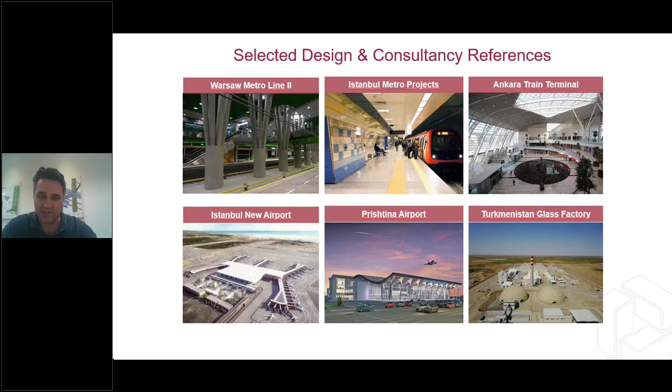And so this has kind of helped shape the way in which the software has developed over the years as well. So it just gives you some insight into what we're doing in practice, and you can see that we're also delivering projects just like you.

So there's an interesting timeline for what we've been involved with. In fact, as I mentioned, the office started back in 1935, and we started commercializing software in the early 90s. In 2000, we had what was then the global release of a product called Orion. So we commercialized the software which we had developed in-house in the early 90s, and it culminated with a product called Orion, which was released in the early 2000s.

We were one of the first to introduce bidirectional integration with Revit, being a physical modeling system. We started this process back in 2007, and we continued to develop that platform for many years, but then in 2015, we redeveloped the entire suite of products, which became known as ProtaStructure. This has evolved tremendously over recent years. And we're now in a position where we're in the process of completely redeveloping our whole platform, which is something we're very excited about and we're going to be launching very soon. So watch this space.

So we've got about 300 people on the design and development side of our business, and we support a range of interesting businesses across the world. I think there's over 10,000 people using our platform on a daily basis, and that's supported directly by us and our really valued partners in over, I think, 17 countries now, if I'm not mistaken.

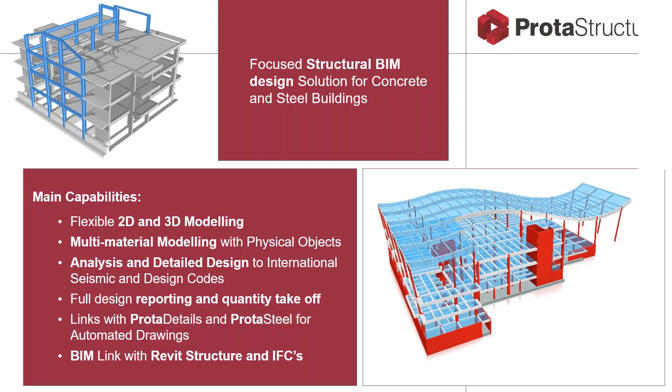Now, I think people like it because users tell us that it's easy to use, and it also helps with driving productivity.

Sorry, I'm getting some messages. I think you can see my screen on the side. I don't know how to minimize this. Okay.

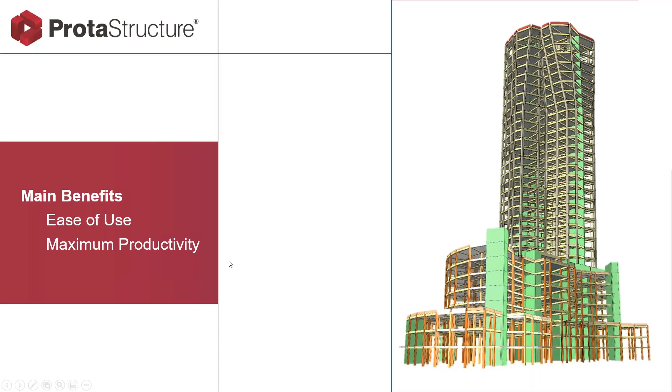Now, just give me a second. I know you can see my screen on the side. I'm just going to maximize it, and then I'm going to try and minimize my screen again and see if you can't see it. Okay, all right, hopefully that's hidden it. I'm getting messages from my team here as we go.

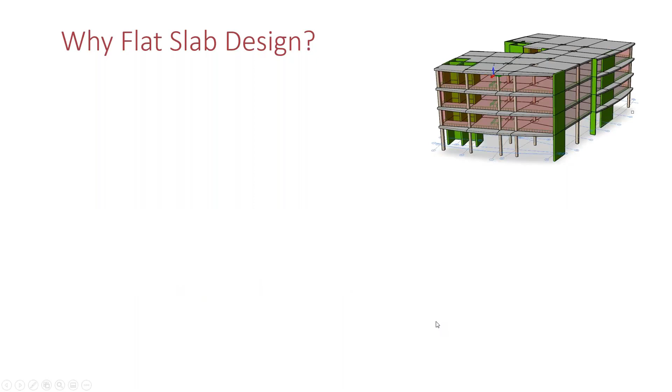So today, this topic is on flat slab design in ProtaStructure. Now, what do we mean by flat slab design, and why flat slab design? Well, perhaps you can tell us what that might be for you.

So that may be related to reduced structural zones within your developments. That might be to comply with stringent building envelopes and trying to maximize space within developments. It may be to provide flexible internal arrangements where the architect wants a free hand at how partitions and so on are provided within a building. Maybe just to give it a slick visual appearance, again, an architectural requirement. It may also be for construction, and you may be wanting to erect buildings quickly.

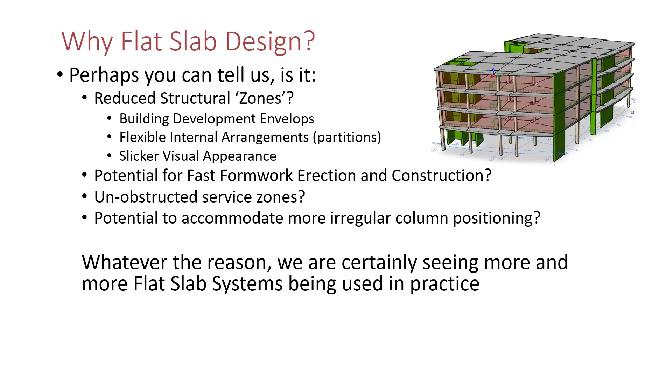You want to minimize the amount of formwork that you're using during construction. You may want unobstructive service zones, and there may be even a requirement to accommodate more irregular column positioning. Again, there may be other architectural considerations. So whatever it is, for whatever reason, we're certainly seeing more and more flat slab systems being used in practice.

Now, what do the codes say when it comes to flat slab design? Well, if you review both the Eurocodes and the British standards, you may know that there's what we would call a simplified method for being able to design a flat slab structure. That looks at creating an idealization where you would look at identifying your column strips and middle strips. You can then build up a simple subframe as you would with any other general analysis software for beam and columns, as a simple model.

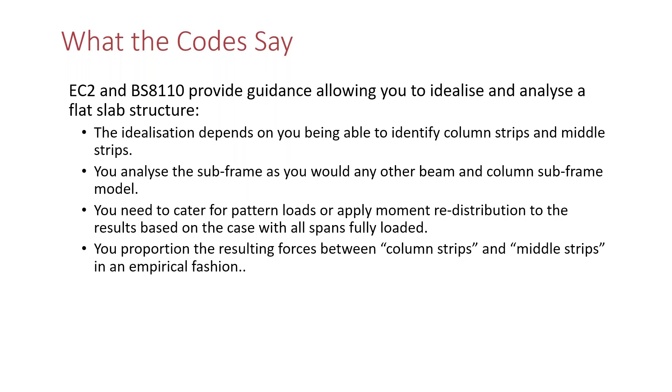And within this, you would cater for things like pattern loading, and maybe you're also considering moment redistribution. And then what you would then do is take those resulting forces between the column strips and the middle strips, and you would distribute those empirically. And the code provides guidance on this.

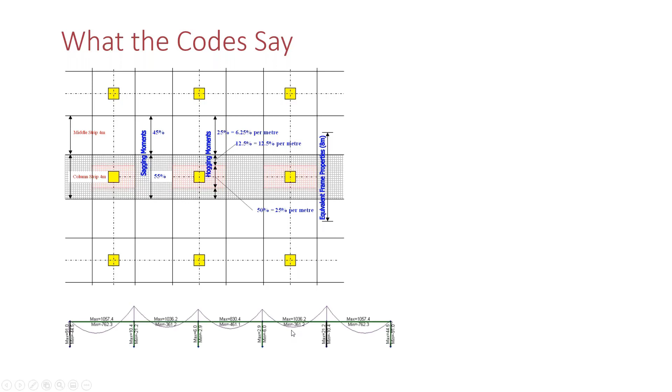So in a very simplistic way, I could take a scenario here where I've got my column strip, my middle strip, and we would then create an analytical model. We would load this up with the loads that were applied across these zones. And the code then would give you ratios in which you would proportion them to your sagging moments and your hogging moments, between your middle strips and your column strips. So the code would provide guidance on this. And if you reviewed the BS and Eurocode standards, you'd see that there's guidance available.

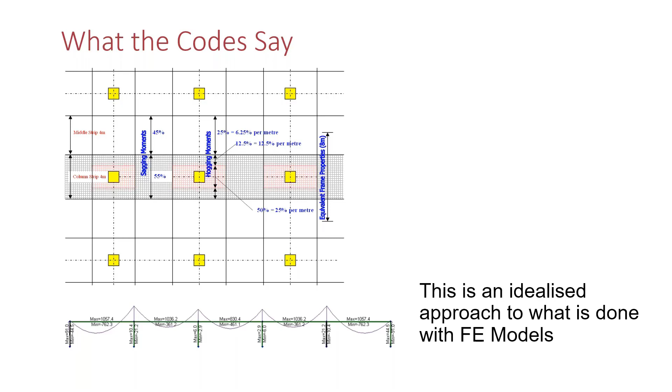Now, this is really an idealized approach to what is done with FE models. So what they've done with the code is taken what might be a real-life situation using finite element analysis and created a more empirical way to do that.

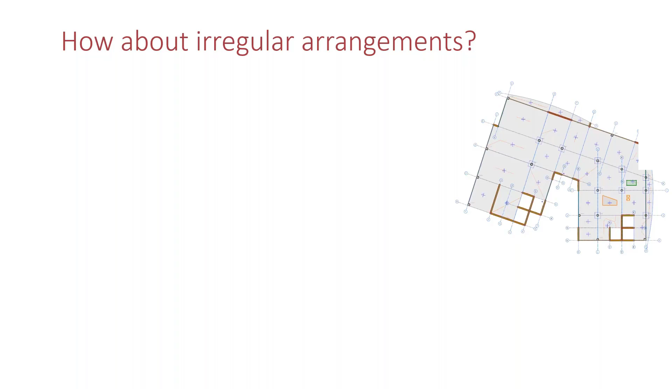But what about irregular arrangements? What if your model's not a square box and you've got irregular arrangements that you need to consider within the model? This is where finite element comes in, and as practicing engineers, we're increasingly having to deal with larger and more complex models. Finite element analysis is really the only practical way in which we can effectively deal with these scenarios.

Now, there's three main considerations with flat slab design that you need to be aware of. Obviously, deflections is a key consideration, and treatment for those within the analysis and design process. Bending in relation to area of steel and localized design, which I'll get to. And we also need to consider punching shear as well as local bearing. These are probably some of the key considerations you'd need to be aware of as you're designing a model of a flat slab project.

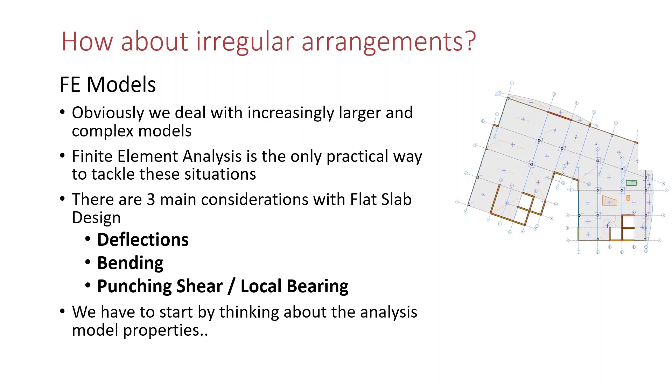Now, I think the first place you'd want to start looking at is the analytical model properties. One of the key considerations is deflections, and for the analysis model we need to think about a number of things - one is what appropriate member or section properties to use. The British and Eurocode standards suggest consistent properties, but is that correct for deflection?

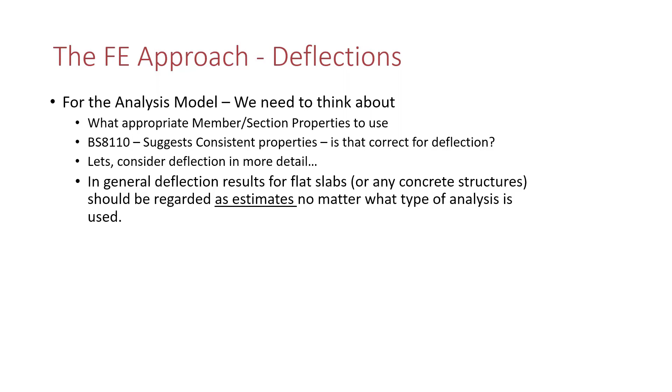If we look at this in more detail, we would know that in general, deflections for flat slabs or any concrete structures should be regarded as estimates, no matter what type the analysis is. And this is largely due to the material properties which you may consider.

If I just took a typical grade of concrete, so grade 40 for example, your E value may vary quite significantly, and this can be due to construction methodologies, perhaps the times that you're striking formwork, the quality of aggregate and materials that you have on site. There's a number of factors that can affect your E values.

This in short also has an impact on deflections. Now, the stiffness - what we have to do is modify the stiffness to allow for this, and in particular we need to allow for both creep and for cracking. So what do we do?

There's been research done in this area, and one of the reports I would point you to is the CIRIA report 110, which is the design of reinforced concrete flat slabs to British standards. You can also refer to similar guidance with the Eurocodes that gives you some guidance on adjustments that can be taken for allowing for creep and cracking.

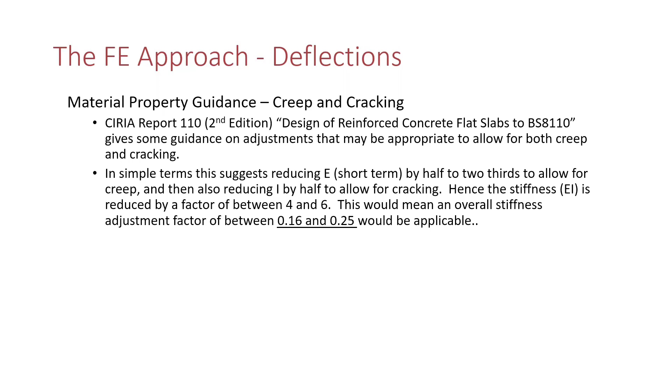In simple terms, this suggests reducing your E value or modulus of elasticity by up to half to two-thirds to allow for creep, and then also reducing your I by half to allow for cracking. So in effect, what we're doing is adjusting your EI value, reducing it by a factor between 4 and 6, which would typically relate to reducing stiffness to a final stiffness of between, say, 0.16 and 0.25.

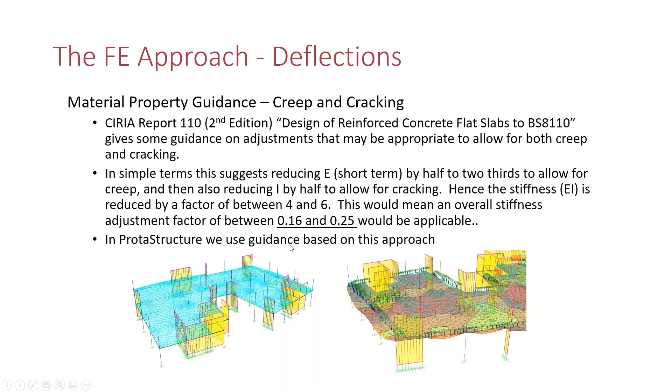And this is the type of guidance that we can follow within ProtaStructure, and I'm going to talk a little bit about this as we move through.

Now, in addition to deflections, we also need to consider bending. The code guidance I talked about earlier is great for regular slabs, but it breaks down for irregular arrangements, as we talked about. And there's two ways in which we can deal with bending.

One is that we can look at area of steel contours using finite element analysis, and we can also interrogate or interpolate those contours to give us some sensible design values. One of the ways that we do that is with integral strips.

Now, if you're familiar with the code, you'll realize that when you have things like columns and positions, moments will peak as they approach the columns. And the code has provisions to allow you to average moments across those peaks - you don't need to take the full values.

Typically for a column zone, you will have an inner column strip and an outer column strip. Code guidance typically allows you to look at the typical spans between columns, and integrate across those column zones by taking those spans and looking at 25% of that span across the inner column strip and 12.5% either side of that. So in effect, we're averaging out the moments across our column zones to provide a more economical and reasonable design based on code requirements.

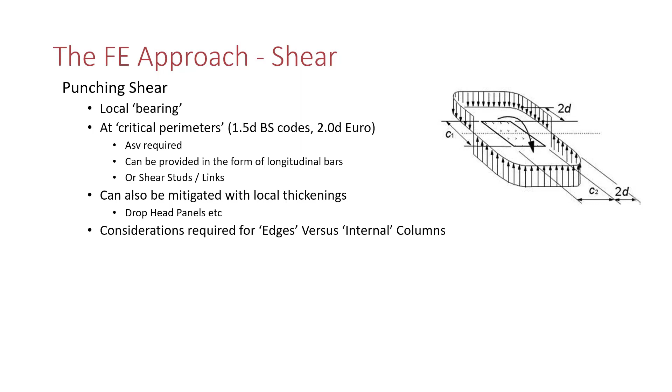There are also separate considerations for edges versus internal columns. If I have columns sitting on an edge or on a corner, the way these are looked at is different from how we would treat an internal column.

You may also need to provide local consideration for, in particular, walls. With walls, you can have local stress concentrations within the wall due to localized bending, and there may be times where you need to look at this independently.

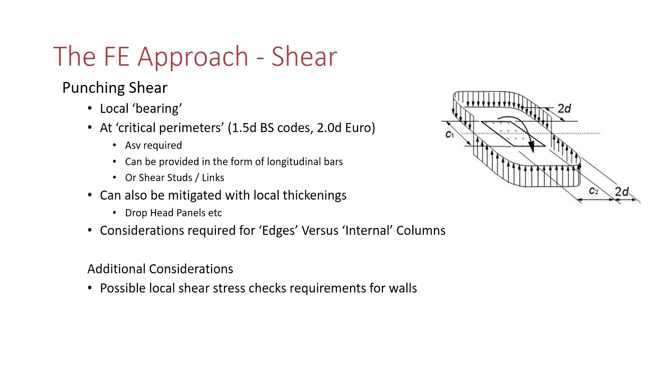We will take the shear forces, and the code will require us to make adjustments to calculate an effective shear force, called Veff.

Depending on the scenarios within the software, we will make these adjustments for you. The maximum adjustment to the British code is for corner columns, where it's 1.25. You can see there's quite a horrendous formula in the Eurocodes, where magnification factors are adjusted depending on positioning as well as openings, ranging from 1.15 through to 1.5 for corners.

In the software we will make these considerations, and we will adjust our shear forces to cater for both shear and local bending at those joints in different directions, to calculate our effective shear force.

Punching shear perimeters are also an important consideration. As mentioned, you can have different perimeters depending on where you are. If you're on the edge of the building, you would check for edge perimeters, and corners again will be checked. We will automatically calculate these and provide effective perimeters for checking.

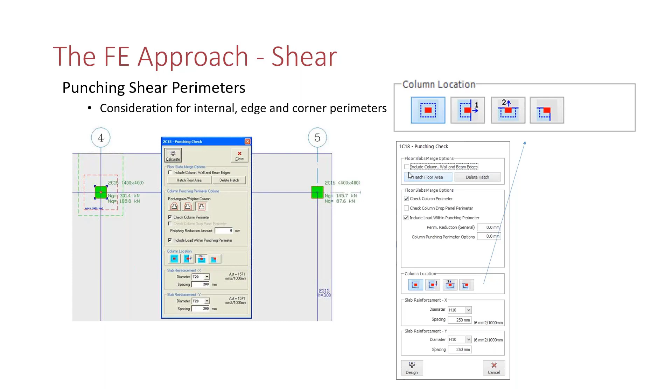The final important consideration within flat slabs is the introduction of openings. You could have openings adjacent to columns and column zones, and you need to consider those within the software. We will look at these and make reductions to shear perimeters to cater for them, doing some quite smart things in terms of how they are considered.

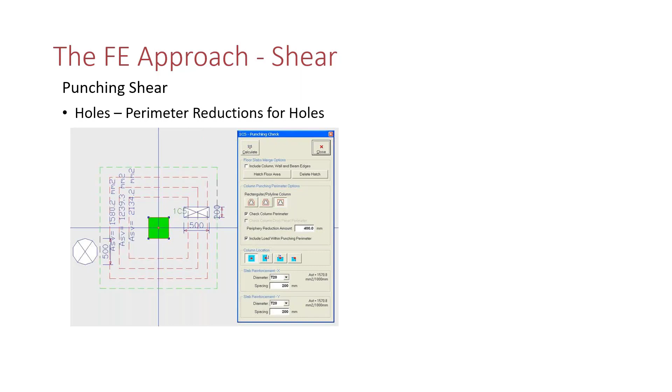So I've just summarised some of the key considerations we're going to look at with relation to flat slab design. I think what I'll do now is just get into the software and show you.

So I've got a model arrangement here. I've imported this as a CAD file, and I could bring in my grid lines and my layouts directly from a reference drawing. At this point, I've already established my column positions and the like, and I'm just going to take this and start to create my slabs.

To do this, I can key in my thickness, so I might start with a slab that's 275 thick, and I can also come and define my load.

I'm going to put in my superimposed dead load. If I'm not sure about live loading, there's guidance here based on the code that you can draw from. I'm going to assume that this is an office building, but obviously we can manipulate that.

The way in which we insert slabs can be done in a number of ways. You can insert by beam region if you had a frame model, but I'm going to choose axis region to come and create my slab panels.

You can also pick axes and pick points to create these. So let's start putting in some slabs, and you can see I've just created some slabs there. If I hit Control, I can choose a panel and create a slab.

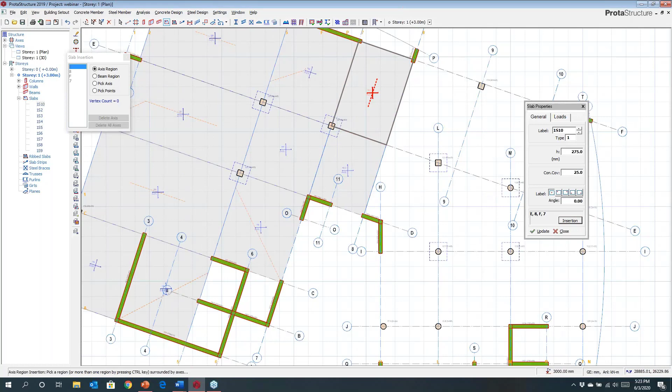As you're going, don't worry about the yield lines that are getting created here, we're not interested in those for this example. I'm just going to run around and create my slabs as I go, defined by the axis boundaries we've created. If you've got curved positions, they can be created by defining curved grid lines to set these out.

You can, as you go, make changes. So if I decided that maybe in another part of the building the live loading is a bit higher, we can come and define those as well. Let's run around and put our slab loads in, slab panels in, just coming here and defining a few more. Let's quickly create these.

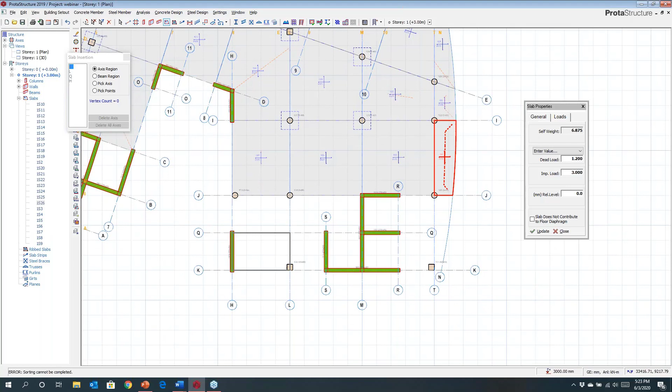I'll hit Control again and put a panel in here, and you will establish your panels in a way that's sort of looking at bays. Now the reason we do this, instead of creating one entire panel, is that we have the importance of considering things like pattern loading, and I'll get to this shortly.

So I've come and created a zone here. At this point I can check this using my Visual Interrogation Manager just to check my basic loading. You can see here for the live loads I've got 2.5 and 3, so I can just visually check to make sure that's okay.

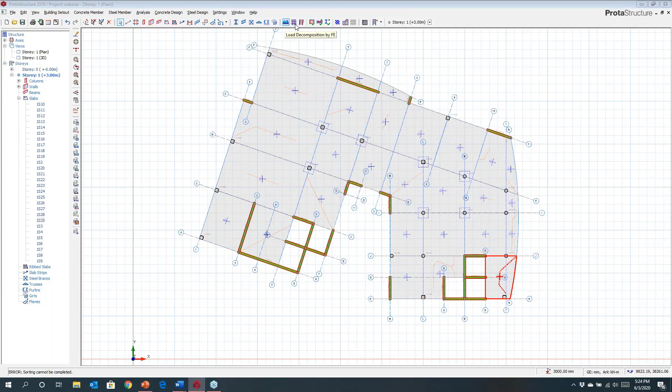What I can also do at this point is check my pattern load variations. If you click on this, you can see that we define different pattern load variations in plan, and you can see the different variations here that can be used by the software. This is quite a smart way of being able to pattern load panels. Traditionally, you may have been making adjustments to your pattern loading to take into account the effects of this within the design. Typically, with FE analysis, this is not available.

But here, you can make adjustments to these. This is a checkerboard, so you can turn pattern load variations on and off. If you wanted to look at different patterning, these can be easily defined. The idea is that we can create a checkerboard of the different permutations you may come across within a project. These can be numerous, so we give you control over how you may want to set this up within the model.

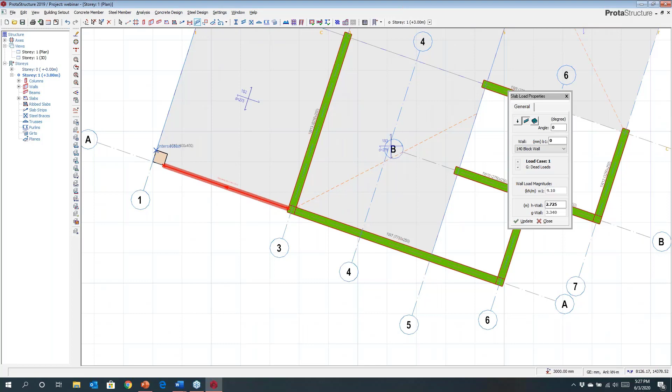At this point I may want to add a little bit of additional loading into the project, so I'm going to create some more loads. To do this, I can just grab, say, a block wall, and type the height in—let's assume it's about 2.7 meters high—and we can then run around the perimeter of the model here and create those perimeter loads. So here I'm just coming and putting in our loading.

Now you'll notice that I'm covering multiple bays, and the software has just advised me that to consider this properly, we need to use finite element analysis. So you can be as accurate as you want with this. You can see that I'm just loading to the face of a column or wall, or I can pull the loading all the way through—this is entirely up to me. We can just set this up to suit.

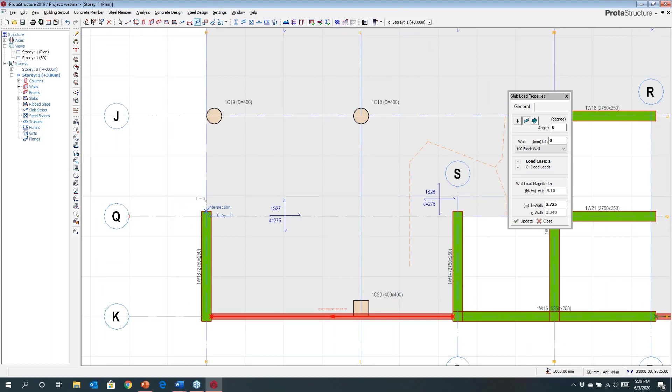So I'm just running around here—let's put these perimeter loads for the walls in. Let's go to there, and I'll just finish this off, just give me a few seconds and we'll be done. So again, this could just be my perimeter wall. You can do a similar thing with your internal partitions and just apply that loading to the building.

So we'll run around a few more, and I think we're done. Okay, you can see here I've just come and created that loading quickly.

There are other things you could consider here. Maybe I've also got a plinth that I want to include, or maybe some local loading within the slab. That can also be defined here.

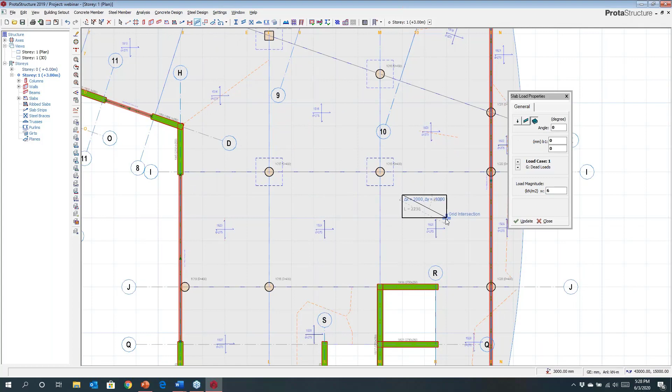You could also come and introduce other considerations you may have within your building into the model. One consideration I touched on earlier was openings, so let's create an opening that might be for services just adjacent to that column there.

As part of the model, and tightening up my architecture, you may do other things within the model, like openings for walls that you wish to define. I'll just come in and do that, maybe put an opening in the wall there, and adjust the position. These types of things can easily be adapted within the model.

Now I'm just going to show you the 3D view. You can see here that I've created what is a subfloor at this point, along with my floor view, my walls, and my partitions. I've also got a few column drop head panels there.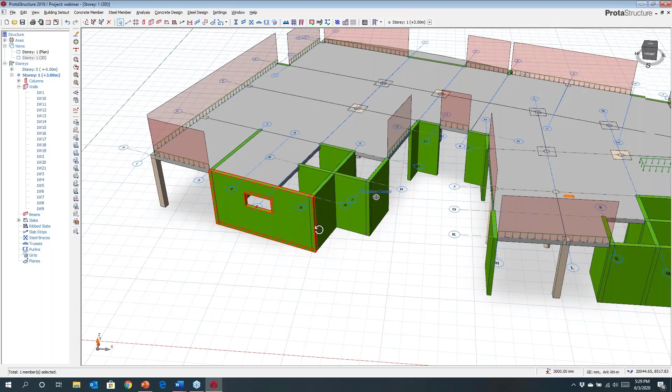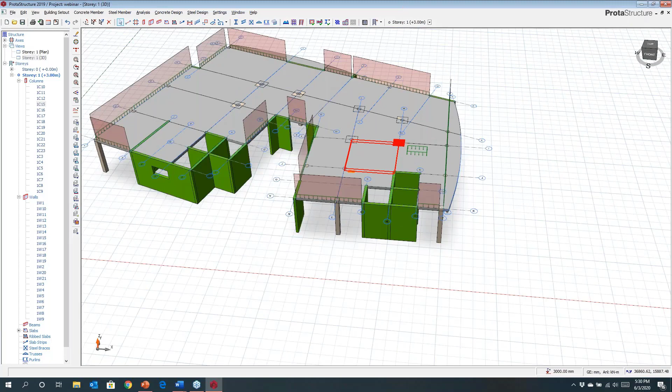They can easily be created within the model. If I just look at the properties of any column, you can come and add those in here, feeding the dimensions of what you want to create for the drop heads, and they can be included as well. You'll just choose the zones where you think they may be of consideration, or choose not to include them at all.

Now I'm going to come in and generate some stories, insert a few floors. Let's make this a 4-story high building, and we can generate that upwards. I'm going to take that floor and copy it up the building, generating this information up.

You can choose what you want to copy. If you didn't want to copy some of the slab loading we had defined, that could be removed. It's entirely up to you how you want to do this. So you can see here I've created up to 4 floors now.

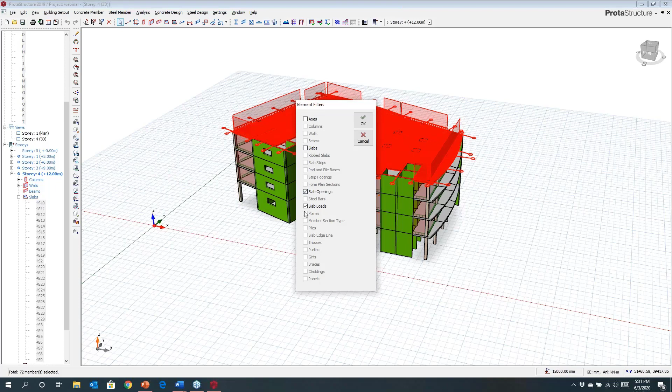Now I'm just going to select the roof level because I want to make some changes to the model, and tidy this up. I'm going to remove my slab openings and slab loads for the roof there, and just assume I've got the live load acting there on the roof, which may be sufficient for this example.

So I've quickly come and created the model here. You can see I've got a few openings in the walls. You can come and visualize the model here and just make sure it's what you would like to proceed with.

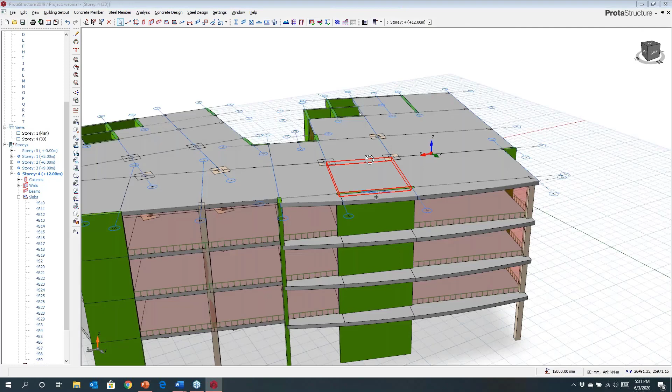I'm going to save the model at this point because I want to start to populate the geometry, and I'll use this for looking at creating wind loading. The software will then be able to establish the extents of the building, and I'll be able to apply my wind loads to this. So just give it one second and we'll be done.

Then we can carry on with looking at moving into the analysis and design processes. So we're done now, and let's move in and start to look at how we might go about analysing and designing this.

Today's session I'm designing this to the Eurocode, so you can select the codes of practice you wish to use. You can also come in here and predefine the grades of concrete and steel you may wish to employ within the project.

Now I'm also going to establish my combinations here and generate them. Earlier you saw me create some pattern load variations, so I'm going to set those here as well. I'm also going to create an unfactored case because I may want to look at unfactored deformations.

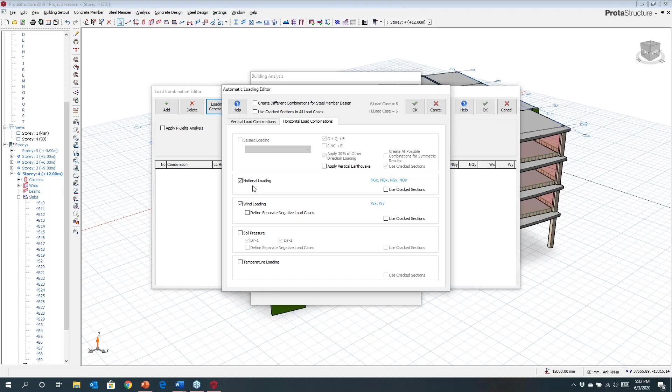Okay, I also want to establish my wind loading cases here. Wind loading and notional loads, which are considered concurrently to the Euro code, are also created here. Now, if I hit OK, you can see that the software has generated all these different combinations automatically for me.

That's been established. I'm going to look at the model options for the building now. I'm going to assume that my walls are going to be meshed, and for this example, I'm going to assume that all my slabs are meshed as well. So I'm going to mesh the entire building, walls and slabs.

Now I'm going to turn on the diaphragms. So I'm going to assume that the slabs are going to act as diaphragms, and the stiffnesses of the slabs, in-plane stiffnesses, can be managed here as well.

Now, the other interesting thing I'm also going to do is assume that the column sections are going to be present in the FE model that we generate. So I'm going to create boundaries around the edges of the columns when we mesh, and that will be included within the analysis.

Once I've established this, I can then just move in to look at the analysis and design. I'm going to run this. You'll just have to bear with me, it will take about a minute.

Okay, and we can get straight in and perform the analysis here. So it's going to establish the model. Just give it one second. It's just saving this away, and then it will move into this process.

Now, pre-analysis, you can check the model to make sure that you haven't made any silly mistakes with the modeling. So if you have axes that are perhaps clashing, maybe you've made some mistakes with how you've applied your loading, the pre-model check will help establish and check that for you. These are quite sophisticated checks that we do to the project before you proceed with the analysis and design, and this will often trap out any issues that it may find.

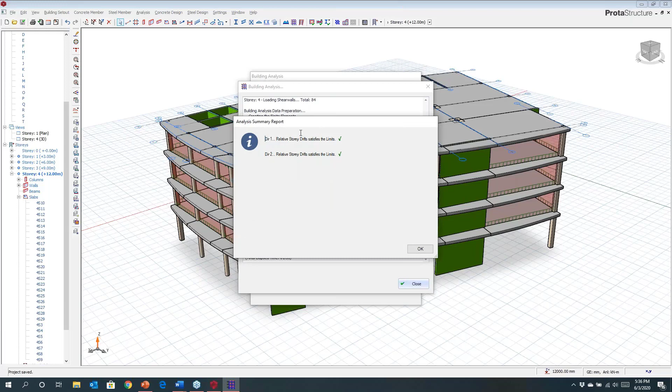Sparse solver will in essence be faster. There's two different types of solvers, and you may ask why. Skyline solver allows us to interrogate the data more rigorously post-analysis, so if there's issues, Skyline solver provides more background, whereas a sparse solver ignores a lot of information as it progresses. So even though it's faster, if there's issues, it doesn't provide us with as much information. This is done, and we've also checked concurrently the interstory drift checks, which has satisfied the code, and we've now completed the analysis.

So if I close this, I can then take a look at the post-analysis results, and I'm just going to quickly look at this within the context of our 3D post-processor. Let's give it a second, it will load this, and then we'll be able to review the results.

So here you can see the model. I've meshed the entire model here, and we do some quite smart things with the meshing. Now, I don't know if you can clearly see my model here, but the way in which we mesh boundaries is very important, and we will mesh them so that all the nodes are matching. So the slabs will meet the wall nodes, and that will provide an effective transfer for our stresses.

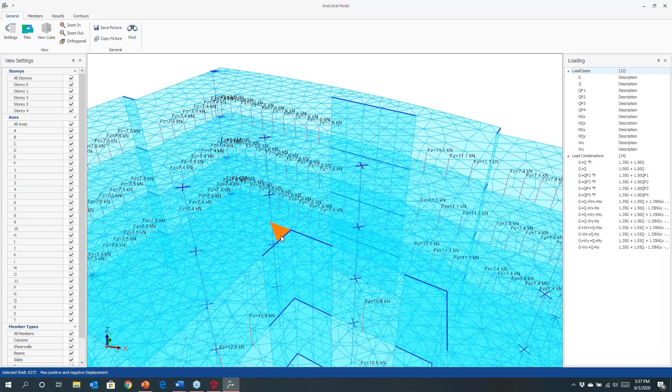Now I can start to look at various results in here. I may be interested in looking at the analysis results for, say, axial load. I can come and interrogate those, and you can see those results clearly. If you wanted to filter out a floor, maybe just see the first floor, for example, we can come and look at that in more detail.

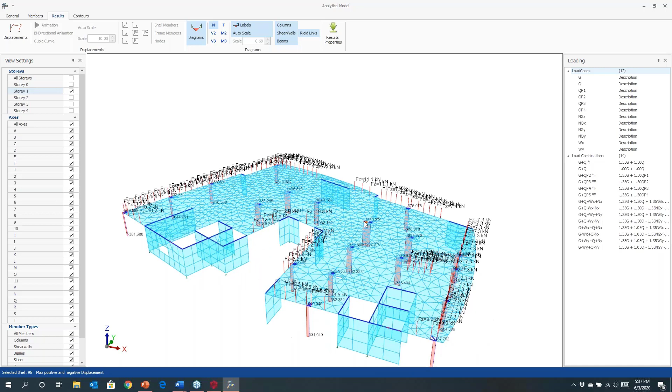The other thing you might notice is that we've also meshed to the boundary of the column. So the actual extents of columns are provided, whether circular, square, or whatever shape, we will build rigid arms within these zones and mesh to the faces. This can provide additional economy and perhaps a more accurate model in terms of behaviour.

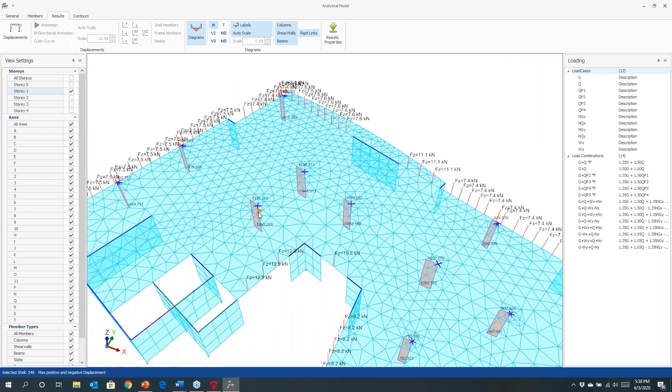I can, within here, take a look at some preliminary contours, and we can look at the behaviour of the slab as part of the overall building if we wish, and you can see those results here as well. But maybe what I want to do at this point is just come out from here and individually look at this in more detail.

Now at this stage I can also get straight in and we can design the columns and walls. So right now, before I even move into looking at the flat slab design in more detail, I can start to produce information from this. We've included the slabs and model in one complete model. We've looked at all the global behaviour of the structure, and we can now move in and start to design and even detail some of these elements before we get too far.

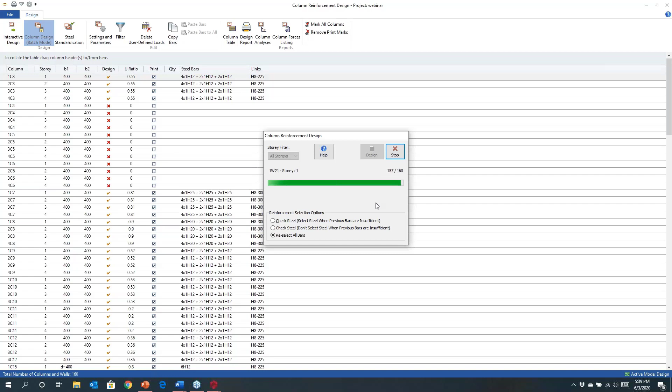So you can see there it's just finishing off the column design. Just give it a sec, it's quite quick. We've done nearly 160 odd elements, and they're all designed.

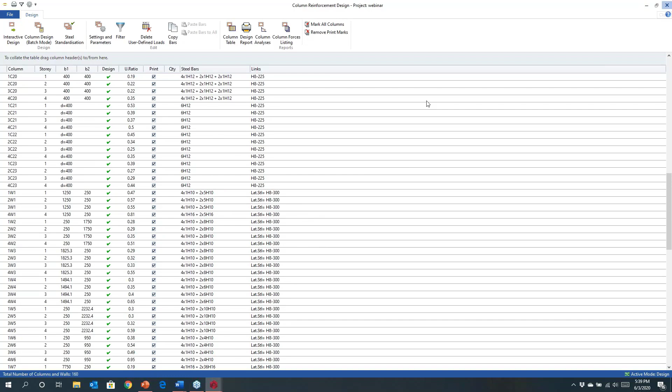I think you can see that all the various checks for the columns have been performed. If you want to look at the status of the column design at any point, you can go back to the visual interrogation and have a look. So if I'd like to see whether everything's been designed, I can just click on that and you can see that they're designed.

Now, even at this point in time, I may want to do some preliminary documentation of the model. So to do that, I could just go straight out to Prota Details and we can start to create some output from the model. It'll just save this and launch Prota Details.

Maybe we're just wanting to provide some preliminary information to site. We may be wanting to start construction processes where we've designed the foundations as well, and we're providing the first story column design to get the project going. At any point you can come and start to document out from the model. I'm just going to show you a little bit of this within Prota Details. Prota Details is not the focus for today, but I just wanted to bring it in to show you how some of this documentation might start to happen.

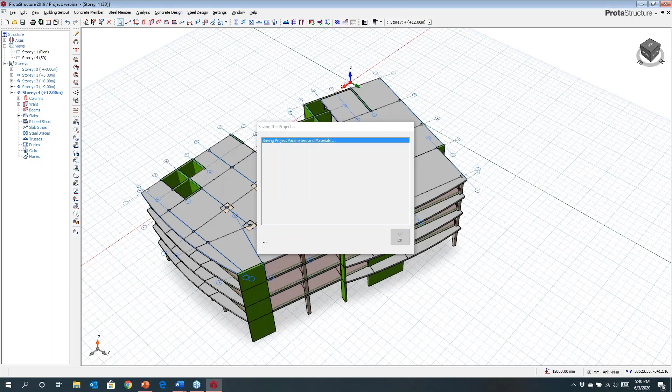Okay, so Prota Details is launching, and then we can start to produce some of the output.

I'm just going to automatically generate some of this. Let's just choose to create some basic information. I'm going to set it to sheets, and then we're just going to ask it to draw. So it will come in and we can draw up information that we have just been creating.

So you can see it's populated here with my title block, and it's now starting to prepare some of that background information. At this point, we may want to create some key plans, our column detailing and wall detailing. This can be generated at this point in time, so as not to slow the overall design of the project down. Just give it a second - a few more columns and walls are being created, and then we can have a quick look at the output here.

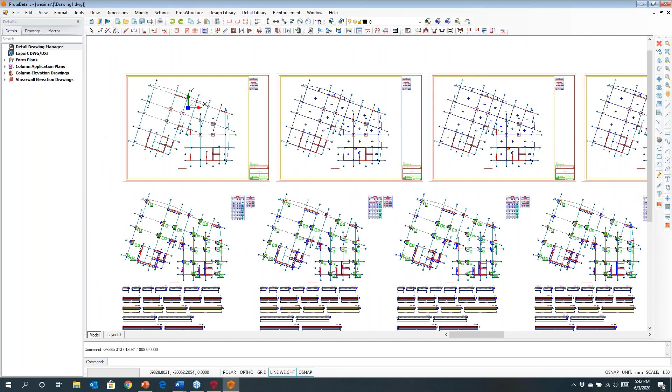Okay, so here you can see that we've come and created the key plans. You can see my column drop head panels, my core walls and the like being drawn. They've been nicely placed into title blocks. You can also see things like set out plans, column and wall details there, which can be placed in title blocks if you wish. And you can also see our elevations there, together with that little opening that I created in that wall earlier. So this is just some of the output that you can expect from the system.

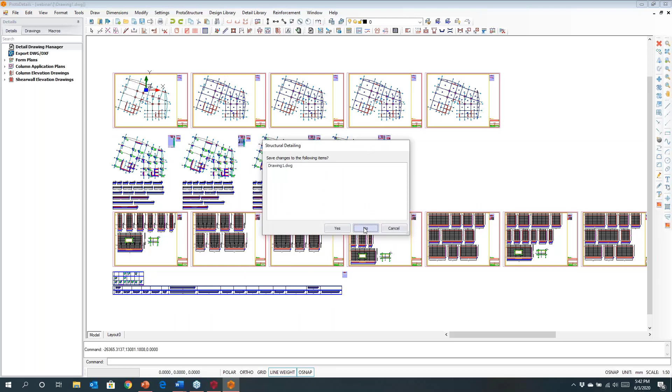Now let's get back into the ProtaStructure model, and let's start to look at things in a little bit more detail.

What I'd like to do at this point is move down to the first story plan, and now run the finite element analysis for this floor. Pre-analysis, we need to establish some conditions here, and one of the important things I alluded to earlier was cracking and creep.

We can consider this within the model, referring to that earlier guidance where you can key in basic typical dead loads and your typical live load, and then we will give you an estimate of the suggested range to consider for crack and creep.

As I said earlier, it's very subjective, so it will depend largely on the nature of the structure. If it's used for storage, for example, these factors will be higher. If it's used for office and domestic use, the range will be lower. It'll also depend on the quality of construction, how you're propping, and all these types of considerations.

As a general guide, there's a recommendation of adjusting the factors between 0.28 and 0.31 of our EI value, so for this one I might use 0.3. I'll accept that, and we will then make those adjustments to the stiffness factors.

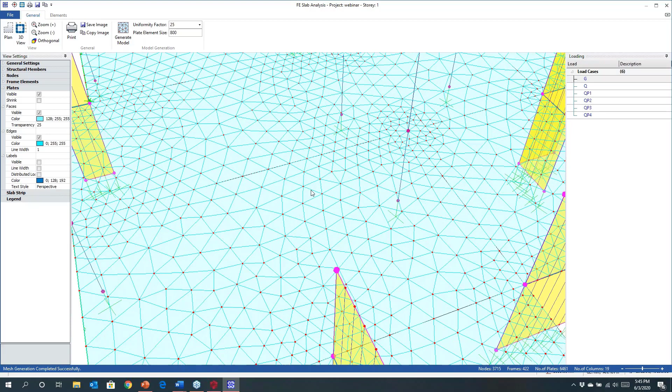People might ask why we're using triangular meshes here and not quadrilaterals. The answer is that especially near column heads, the moments are increasing, and we need to be able to interpolate between points. A triangular mesh allows us to do that and trap out peaks, whereas a quadrilateral mesh is not so effective, and trapping out those peaks becomes more difficult, sometimes you can miss them. This is why we tend to use triangular, or a combination of triangular and square meshes within the slab, and we use square meshes within the walls, which are more effective at dealing with shear.

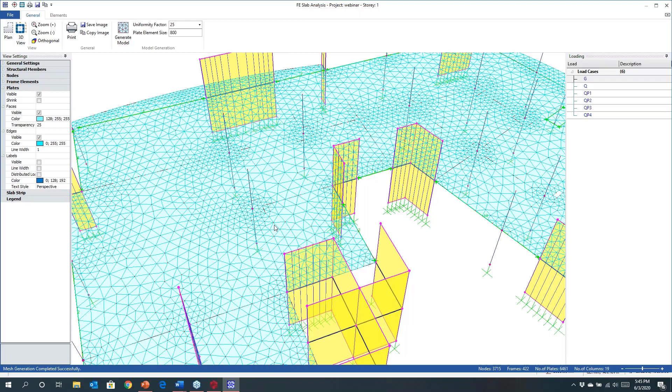So I've now generated that model. If I close this down, it will run the analysis and perform the stress analysis for this particular slab. We're just going to run it as a subframe, and we can then come and have a look at the results.

If you did want to make adjustments at any point to things like moments, you may not be entirely happy with, say, the catering for all the different pattern load variations. You can make adjustments here, so you may wish to adjust perhaps the negative or positive moments accordingly, or introduce a degree of conservatism. This is up to you, but that's available here.

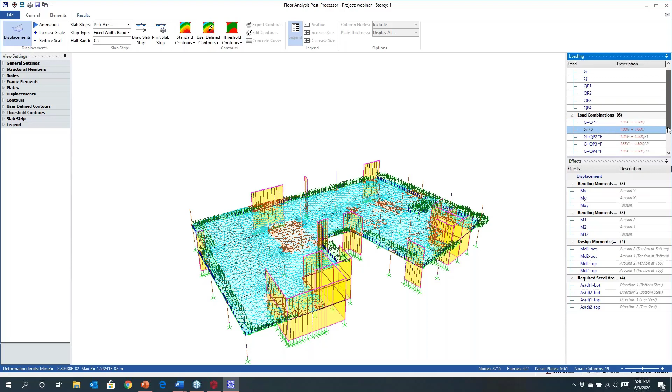I'm going to come and have a look at the output. You can see here that we've meshed it, and I've got some quite exaggerated displacements on view there. I might just reduce those, and I'm going to have a look in particular at the service cases. You can see all the different cases as well as envelopes on display here, and you can choose what might be appropriate for you to review.

And I'm going to have a look at some contours. I can look at this in a 3D perspective, or within the elevation view. You can see from here that this zone off to the top left is where I have the most excessive deformations. In this scenario, I've got a deformation of 23 millimeters as an ultimate long-term displacement, and I may or may not be happy with that level of displacement. This is up to you.

You can come in and provide user-defined contours to map maximum allowables that you may wish to establish. So let me use a threshold contour here. I could say that the maximum displacement within the slab that I would like to accept was 20 millimeters over that period, and it will then show you parts of the slab where that may be exceeded.

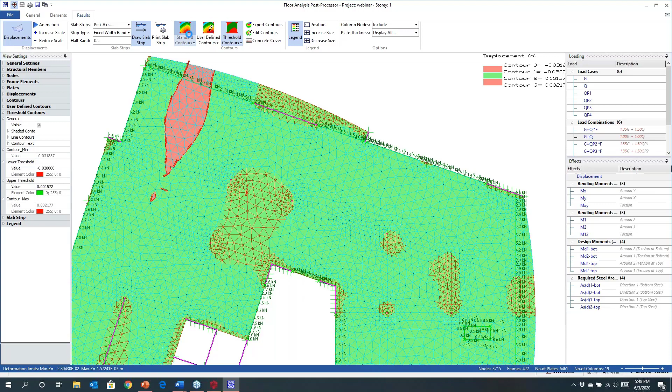So it's not an exact science. Obviously it will depend on the spans that you're looking at. You would need to use some engineering judgment here as to what you would consider to be acceptable, in accordance with the code guidance for the type of building that you're designing.

Another way you can look at deflections is using strips, and I can cut a strip through this part of the model. The deflections along that strip are then resolved, and you can see a displacement of 23 millimeters indicated there for my dead plus live case. I may be happy with this scenario given it's a long-term case, and maybe I've also introduced a bit more propping, so I may be happy with this. This is entirely up to you.

Along the right here, you'll notice that in addition to looking at displacements, we can also look at other effects. So I may want to look at what the moments are in the slab. Here you can see moments in the X direction and the range of moments we have, as well as in the Y. You'll also notice there are MXY moments, and these MXY moments are torsional moments - these are our Wood-Armer effects, or torsional bending within the slab.

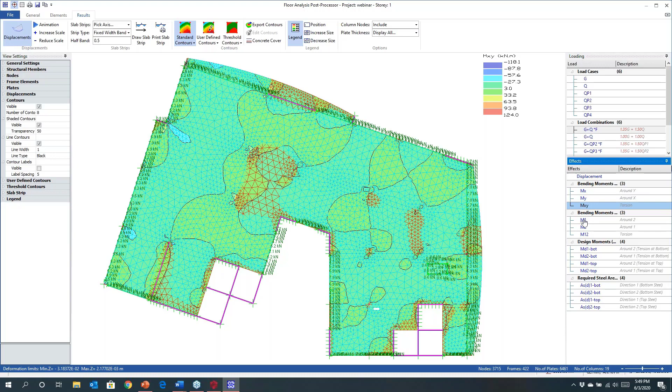Now, what we do is take these Wood-Armer effects and resolve these into X and Y for design. So you can look at both moments globally as well as locally, and these will just be orientated differently depending on what you want to see.

You'll also notice here that there are design moments, broken into moments in the X direction in the bottom, moments in the Y direction in the bottom, and moments in the X direction in the top, as well as in the alternative direction. So in here you can come and view these to give you a feel for peak moments within the slab.

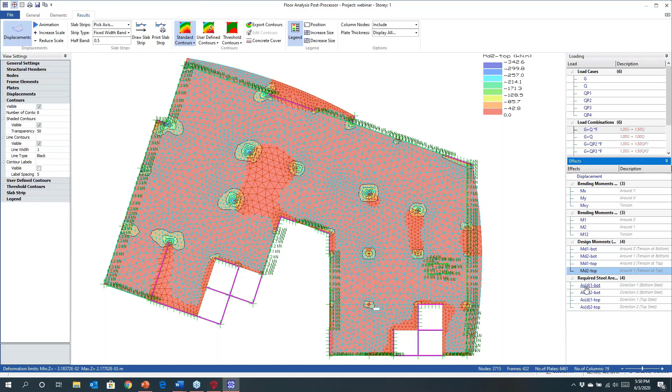Now the final interesting thing here is that we also concurrently have our area of steel contour plots. I may wish to look at the area of steel contour plots, and I'm going to look at the maximum envelope of these within the slab. Here I can see that I have a range of steel from 0 up to 1,015 millimeters squared per meter.

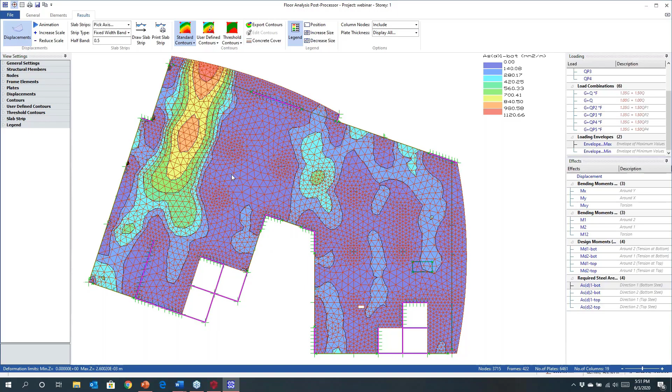Now we may also want to make adjustment for the slab. These area of steel contours are actually calculated based on us predetermining a concrete cover, as well as a basic steel bar size. I might be using as a minimum a 12 bar in this project, so I can come and set this here, and we will then adjust the effective depths in X and Y directions to be considered for looking at area of steel requirements for bending. If I make that adjustment, you may see that very slightly these diagrams have changed.

Now, what do these mean, and how can we interrogate these results? Here I can see this range of steel, but what does that actually mean in practical terms? Well, the advantage we have within ProtaStructure is we can start to use these to lay out predefined contours.

So again, I'm going to choose my user-defined contour plot here, and come to edit contours. In the edit contours here, you'll see that I've interpolated a range of different contours. Depending on the scale of the moments and forces in the slab, you may wish to have more contours - this will be entirely up to you, depending on the nature of the project. But you can use this to help predefine some basic steel. I may decide that for my bottom steel, I'm going to have a minimum bar arrangement of maybe H12s at say 250, that might be my minimum steel throughout this project. And I'm going to ask it to create an interpolation line based on this criteria.

Now, you can see that that's covered almost all the slab here. There's just a little bit that's not covered. And I may decide that for those other zones, I wish to use a little bit of extra steel. I'm going to use maybe one layer of 16s at 250.

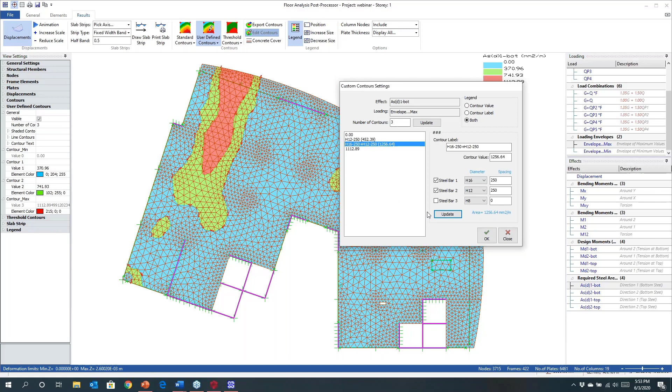Okay, so you can see that this range of steel here is slightly more than the maximum required in the bottom and the X direction. So if I hit OK there, you can see very clearly now that I have a baseline steel, which is the 12s at 250, being used throughout the bottom in the X direction. But locally in the green zones, I need a bit of extra steel, and this is where I need my H16s at 250 plus H12s at 250, and these may be alternating bars at 125 centers. So I know exactly the location of where that reinforcement may be required in the slab here.

Now, if I wanted to, at this point, I could export these contours, and we can then view these contours on top of a model within ProtaStructure, and we could interpolate from those for laying out our reinforcement. I can look at this in other directions, so we could also apply the same thing for the other direction in the Y, and we could do this. But when it comes to looking at things in the top, you may notice that we've got a much higher peaks of steel that are occurring.

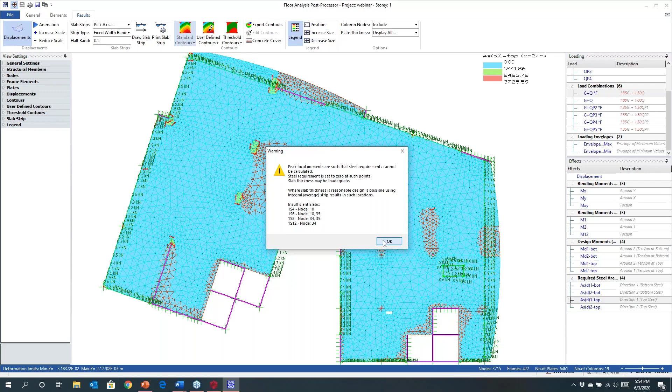Now I'll just turn off the envelope and let's just look at a combination. Okay, I'm just going to look at the standard contours. But what you may notice that when you come in and interrogate the diagrams here, you'll notice that when you get close to column heads, the moments are peaking. As the moments peak, you obviously need additional steel across those zones.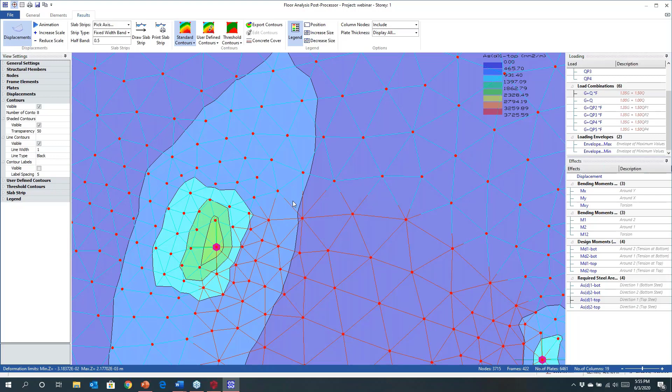Now, if I had to take the absolute peak, which is right at the point of, say, this column here, that may be very high. You can see in this zone here, it's asking for something like 2,300 millimeters square per meter. But the code generously allows you to average across those strip widths. And this is what I was alluding to earlier, where there's an empirical approach that you can use to consider this. Now, what you will do is you will look at the spans that you have either side, and the code will provide you with guidance.

As to the strip widths that you need to consider for design across these peaks. And to do that within the software, we can come in here and set bandwidths. Now, if this was a span of 8 meters either side, I may set a half bandwidth of something like 1 meter. Okay, I think in my situation here, I've got slightly less, but I'm going to take 750 millimeters either side of this column here, and this may be the maximum column head that I'm looking at for this zone. I know that there's other peaks. These peaks are isolated to the walls in this scenario, but I'm just going to choose this, which may be the maximum in my model here.

So I'm going to come and draw. I'm then going to come and choose to draw a strip. Okay, and I can come and choose a strip, and I don't just need to go through one column. I could choose to interpolate across a number of column heads there, and I can then use this to start to look at what might be the effective design for the steel work across those column heads. So here you can see it's creating our integral strip.

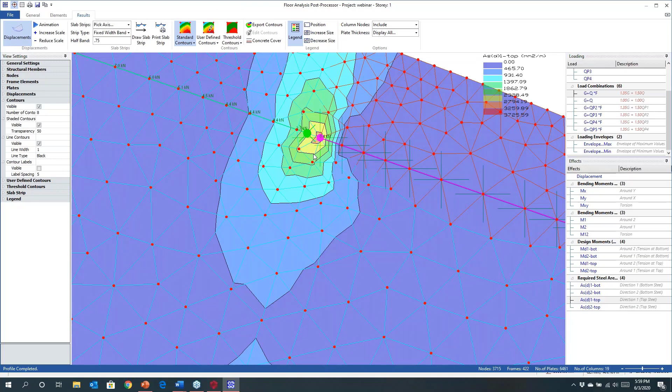Now, the beauty of using the finite element analysis is you can set up these support band strips and mid band strips wherever you like. So I will naturally have different requirements for other parts of the model, but you can just cut these strips wherever you like. You'll also notice that at wall locations you may have higher localized stresses, but these are quickly diminishing. By taking advantage of the integral strips, you can plan out the reinforcement you may require in these zones.

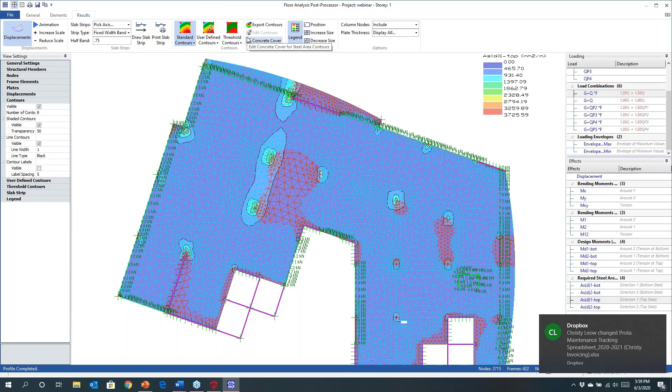So that's one way in which we can interpret the design and come up with a sensible design for the flat slab. We can use area of steel contours, take advantage of integral strips, and also take advantage of user-defined contours, which we can extract back to our model for refinement as part of the detailing process. So I may at this point just be happy with that.

And I now want to come in and look at the model in more detail with respect to other considerations. So we may have designed our steel, we've got our baseline steels, we know what's in there, we know what's in the peak across the column heads, which is say 16s at 250. I now need to come in and look at punching shear.

In here we can come and select columns. You can choose the whole floor plate if you want, but I'm just going to look at these as an example. Within the software, we can ask the program to check for punching shear. It's looking at the perimeter, and these are internal columns, so I'm checking these as an internal perimeter. We can also check the column drop head panel perimeter, because locally within the drop head, as you get to the edges, you may have additional local shear stresses or changes in shear capacities there, which you may also want to check. So we can also consider this.

And I'm going to define in here the slab rebar that we have. So we have 16s, and they're being spaced at approximately 250 as my maximum. We can come and set this, and let's just assume in both directions the values are the same. Let's change this as well, so let's go for 250 or so. Okay, so I've set these up, and then I can just ask it to design this.

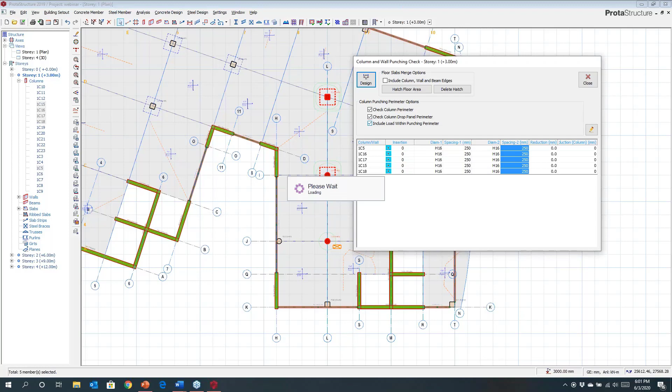So it's now checking the design of those zones, and the software will at this point provide a report. ProtaStructure will generate a report now, and it will provide you with all the underlying checks for the punching shear. So we're doing a number of checks here: we're checking at the face of the loaded area, and depending on the code, we are also checking at either 1.5D or maybe 2D away from the face of the column.

Now, earlier I mentioned that there are adjustments being made here to calculate our effective shear, and this is based on the biaxial moments that are also present in those columns. So this is based off the frame action that may have occurred from the building analysis, and being able to mesh the building, mesh the floors within the building, and provide a comprehensive building analysis with all the localized stresses is also being taken into account here.

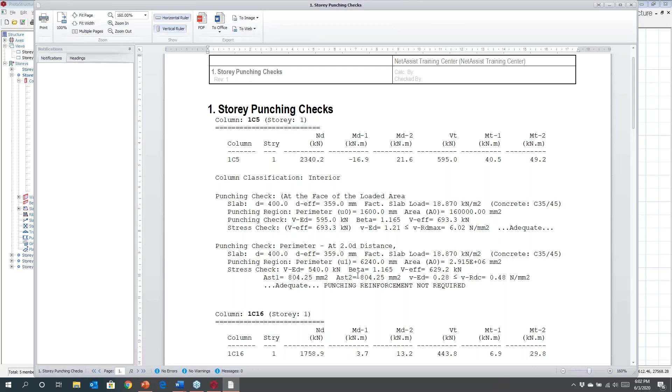And you'll see that it's then checking these perimeters and ascertaining whether or not we need to provide any additional shear steel. So all these checks are done for those columns, and in this situation here, these have all passed, and you can see the detailed checks and code clause references there.

Another interesting thing we've done here is that even when we have openings in the slab, we are adjusting the shear perimeters. These can be automatically adjusted, and we will reduce the shear perimeters accordingly.

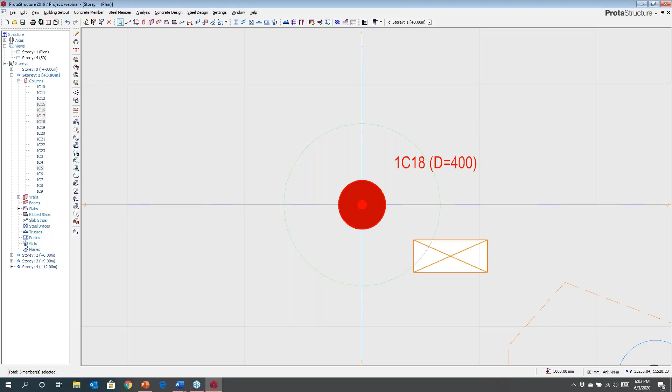Now, if you found that for this particular column you wanted to change that further, you can come in and manipulate this further. So if I decided the shear perimeter needed a larger value or a bigger reduction, I can make those adjustments here as well.

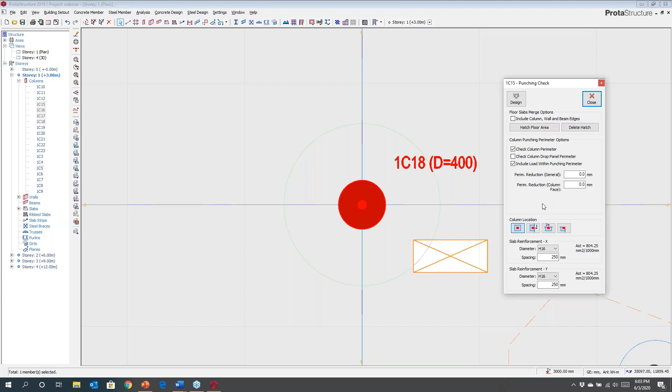Now what about other zones? Let's come over here and look at this edge column. If I just select the column, you can individually go in and check a particular one. I'm going to check this perimeter and look at the punching perimeter, choosing the edge location. Just be aware that we're not automatically working out whether it's edge, corner, or internal—you do need to do a bit of work here to set these up. So just choose the appropriate column location.

You'll also predefine the steel that may be provided locally—we could assume 16s at 200, for example—and then we can design for this perimeter.

So what you might notice here is that this perimeter has not actually satisfied the code. From the checks, you'll see that in this locality I do need a bit of extra steel, and we've defined the amount of additional shear steel needed, which can be provided in the form of links.

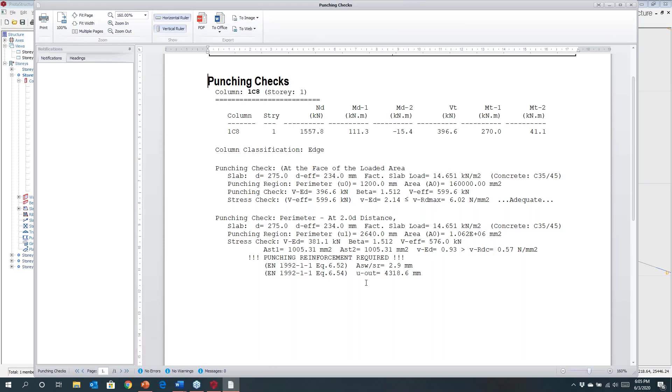They could be studs that you include, or you could look at increasing your longitudinal bars to see if that helps this pass. But what we're doing is checking these parameters in detail and providing you with localized requirements in terms of additional steel—there are quite sophisticated checks being carried out here to determine those parameters and perform those design checks.

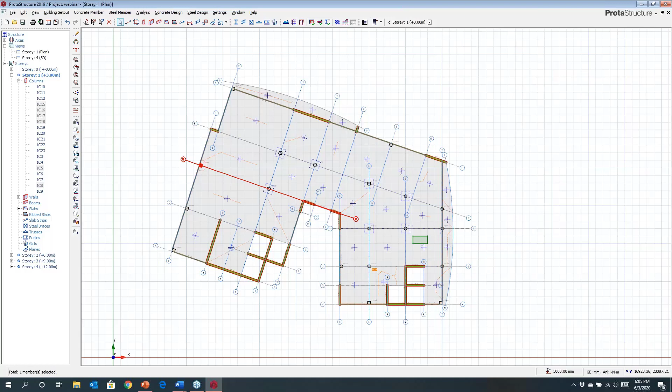So I wasn't going to go into a lot of detail today in terms of designing the whole building—well, I have, I guess—but I wanted to give you a flavour and some insight into the considerations you need to be aware of when designing flat slabs, all of which can be done within the ProtaStructure model. So if you bear with me, I'm just going to conclude.

So we do have comprehensive treatment for the design of flat slabs within ProtaStructure. Models can be easily created, as you saw, and you can make considerations for very irregular arrangements, introducing things like drop head panels where required.

You noticed I put the panels in to suit the way I wanted to carry out pattern loading, and we perform full FEA analysis. That could be for the entire building, or you can look at it on a subframe basis for local treatment, including long-term creep and shrinkage effects, which I covered.

Within this, we make considerations for things like pattern loading and frame action with the entire model, meshing the slabs together with columns and walls, and looking at the localized stresses and actions around those.

We can make detailed considerations for creep and shrinkage. I took advantage of using integral strips to work out what my maximums may be across my column heads, as well as looking at area of steel contours for defining rebar arrangements.

Now just to conclude, what I've shown you today has been used on numerous other projects around the world, and we've used it actively on some of our own. We took advantage of this with the new international airport, as well as some universities we've recently designed.

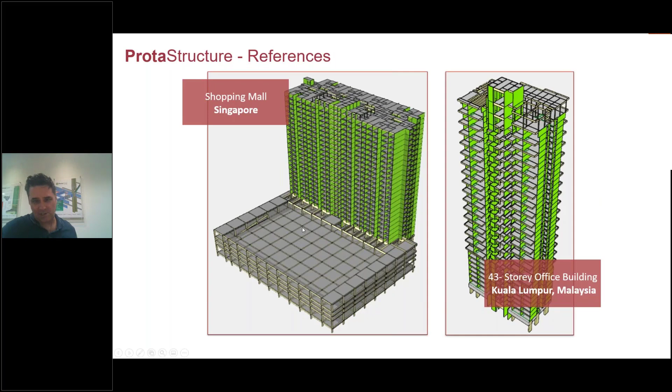You can see some of those models here with flat plates, particularly for things like roofs. Here are some other models using flat slab systems in Singapore, and another interesting project in Turkey where we've designed flat slab systems. You can get into some really huge systems with things like transfer plates and the like.

We are obviously supplying software to a range of interesting businesses around the world. It really is a fantastic period for us as we grow to engage some of the other leading consulting businesses worldwide, as well as our fantastic user base, ranging from one-man bands up to some very eminent businesses.

I think the key behind the solution is that it's not just about building design. Yes, that's part of what we do, but our vision is to go end to end - from modeling, analysis, and design right through to full documentation. That includes all the drawing management, drafting capabilities, component design - you may have seen that in earlier webinars with Prota Details - as well as fabrication detailing, whether that's rebar schedules or steelwork fabrication, breaking out connections and providing all the shop drawings. All this is part of the platform we've been working very hard on over the years.

Increasingly we're seeing many of our clients starting to interact with other project team members, and BIM collaboration is also becoming increasingly important. This is also a key consideration in how we've developed the platform, being able to share that information out with others.